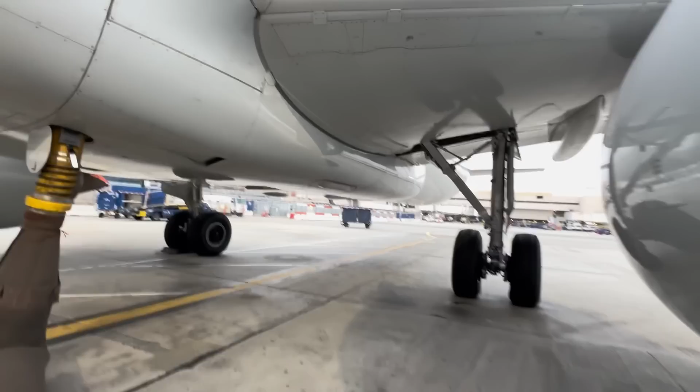Do a quick little walk around, make sure everything's A-okay. Drop the gear door, make sure the barking dog is still up there.

As I mentioned before, this is an Airbus A321 Neo, and this is how we drop the gear doors. Pretty much all major aircraft have this. In order to drop the gear doors, we pull a specific handle which releases the uplock. We have to drop these gear doors for maintenance purposes.

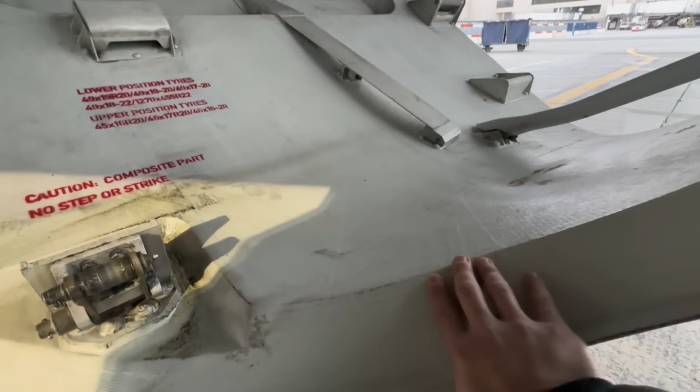A few components on this gear door itself. On the left, that little knuckle is the uplock roller. That is what gets engaged into the uplock actuator and holds the door up. Those things you're seeing towards the middle are called fixed ramps.

So let's say there was an emergency and the landing gear needed to be gravity dropped, or what we call a free fall extension. Pilots will either turn a lever or flip a switch depending on the type of aircraft, and the landing gear will drop under its own weight. That's what we call a gravity drop or a free fall extension. Now these ramps are there to make sure that the main landing gear does not get caught on the landing gear doors during a free fall extension.

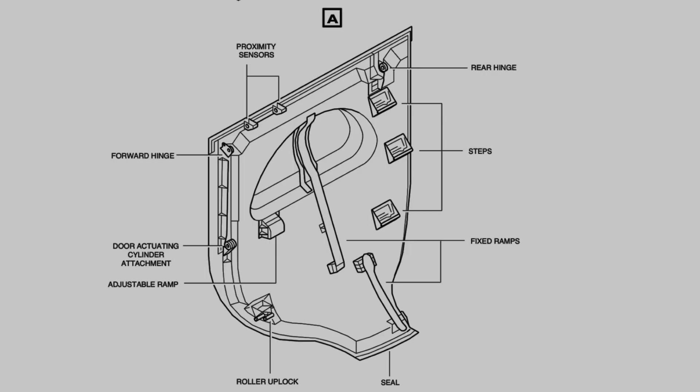The gear door also has proximity sensors and the hydraulic actuator that brings the gear door up, as well as steps for us maintenance to climb up there.

Now let's take a look inside of the wheel well itself. Nice and neat, isn't it? Much cleaner than the 737. It's a lot more organized and it looks much nicer, a lot more room to work in my opinion.

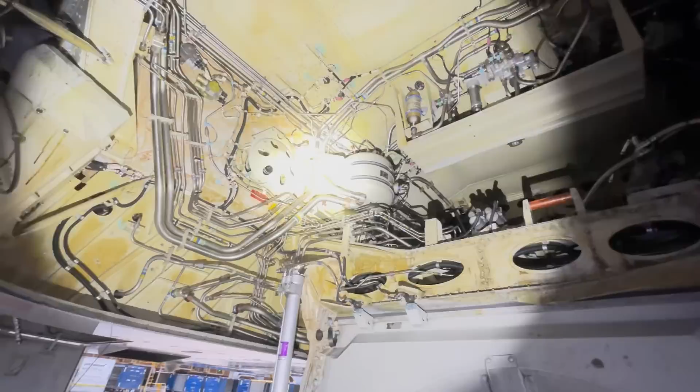There it is, there's your famous barking dog right there. Those rods that you're seeing are called torque tubes. They are for the flap control system.

Now this is a very important component that you're looking at. That is called the PCU, Power Control Unit. It is a hydromechanical unit. Its primary job is to supply mechanical power to the flap transmission system.

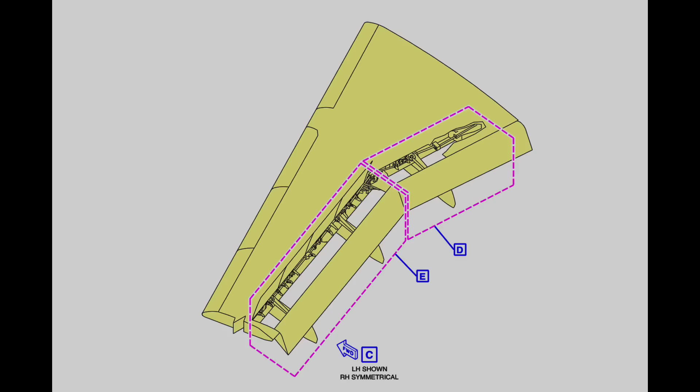It has two hydraulic motors. Once power is provided, the torque shaft and the gearboxes transmit the mechanical power from the PCU to the offset gearboxes of the actuators. A fancy way of saying it will turn those tubes and drop the flaps via transmissions. Watch, I'll actually show you how it looks in action.

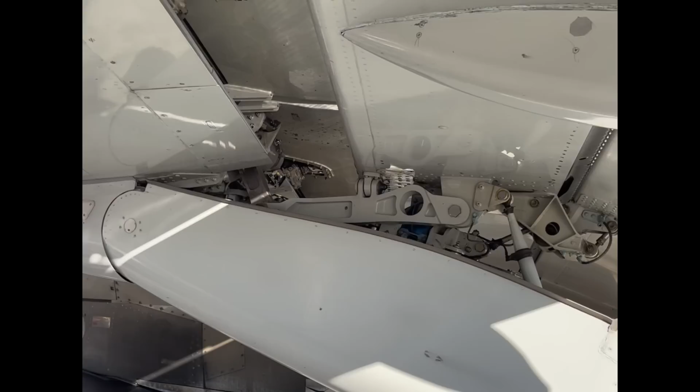As you can see, a pretty intricate system. There's also another very important system this ties into. It's called the WTB, wingtip brake.

It's a form of protection for the flaps. It is an electrohydraulic pressure on brake. What it basically does is prevent the flaps from going off symmetry, meaning you don't want one side of the flap going down further than the other. You want them both coming down at the same rate.

The other protection it does is in case you have a runaway flap, an uncontrollable deployment where it's going full flaps down. It will lock the flaps in a very particular position and stop it.

There's circuit breakers tied into this that are only for maintenance, and these are so pilots don't play with them. Pilots, do not play with these circuit breakers. Bad things will happen. Only maintenance gets to touch these.

As we continue our tour of this 321 Neo wheel well, next you're going to see this thing. That's a reservoir, that particular one is for the green system. There's two others, one for the yellow, one for the blue. This is where hydraulic fluid lives.

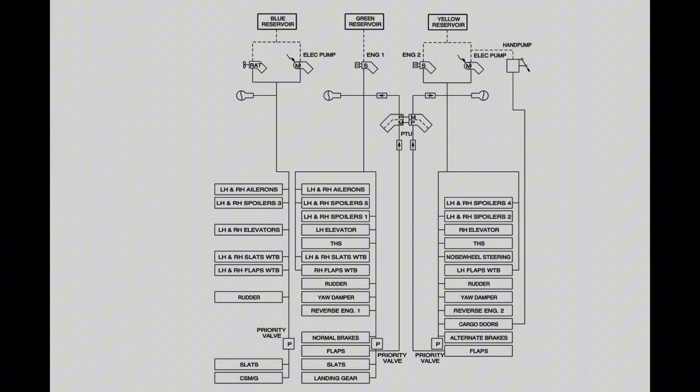Here's a lovely diagram for you, and this depicts every single hydraulic system and what they control. Feel free to pause it and take a look at it closely. Just take a look at the level of redundancy, it's absolutely incredible. If you were curious how much capacity these systems have, the green system has about 100 liters, the blue system about 60 liters, and the yellow system 75 liters.

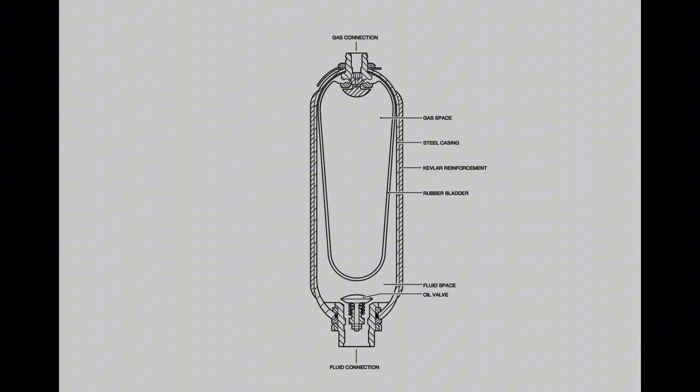As we keep moving forward, you're going to see that cylindrical component right there. That is an accumulator, there's three of these, one for every system. It has a metal body with an outer layer of Kevlar to make it strong. It also has a bladder inside that separates nitrogen and fluid. It will keep head pressure to the reservoir, and it also keeps the system free from small fluctuations in pressure. It also makes a supply of fluid available just in case there's a decrease in fluid in a system. It could also compensate for a temporary decrease in pressure just in case the response time from the engine-driven pump is not enough. Usually pre-charged to around 1800 psi.

Accumulator and a whole bunch of manifolds for hydraulics. Fun stuff.

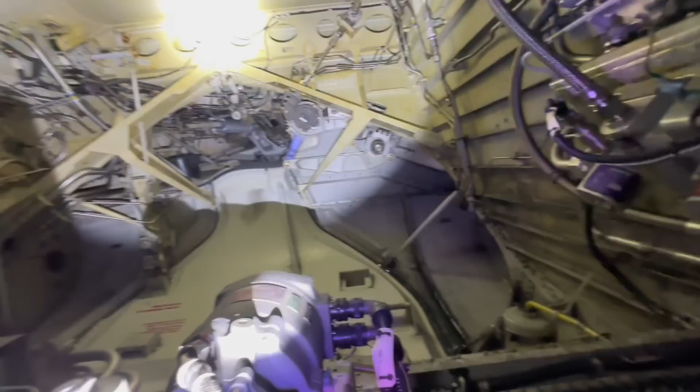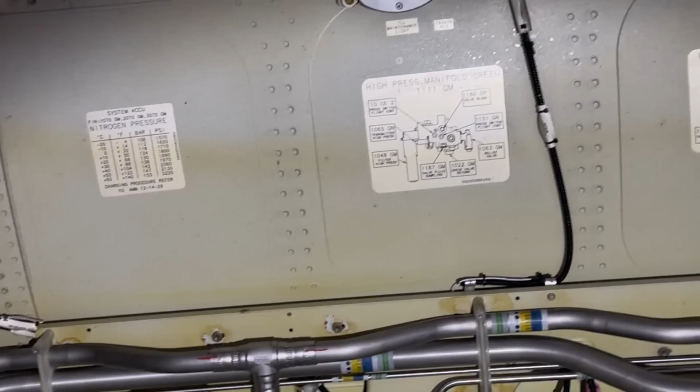Next to the accumulator, you're going to find the high pressure manifold as well as the PTU manifold. There's a variety of components attached to it, such as pressure relief valves, high pressure filters, check valves, sampling valves, and pressure transmitters. Basically distributing the fluid where it needs to go and monitoring it.

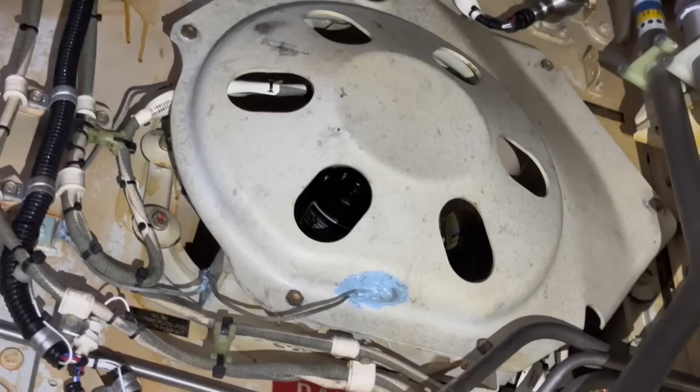As we direct our attention to the forward portion of this compartment, you'll see that component, or I should say it's more of a cover. There are various components in there related to the ACT tanks, the additional center tanks. One of the components inside is a little valve or pump. You can actually prime the pump if the ACT tanks are a bit low, in order to get the fuel flowing if you want to get fuel out of the ACT tanks.

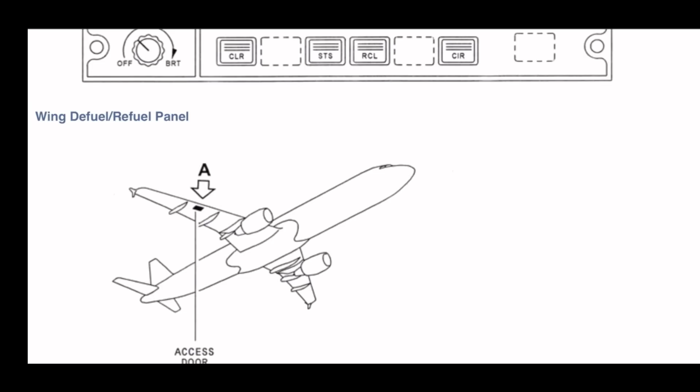Additional center tanks are pretty self-explanatory. The more tanks you have, the more fuel you have, you can fly longer. The most modern 321, the XLR that will be debuting here pretty soon, is actually going to have 3 ACT tanks.

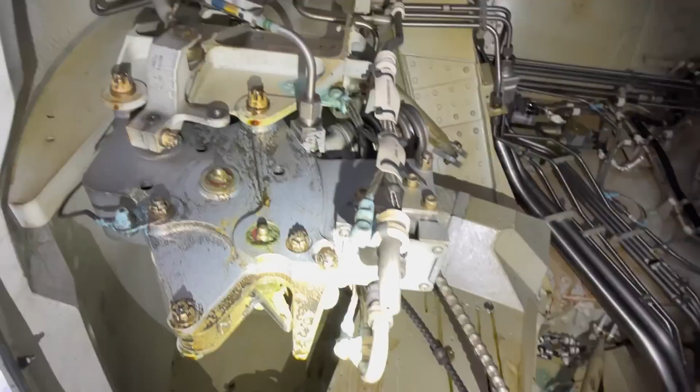Very long flight. Remember earlier I showed you on the door that uplock roller? Well, that's where it attaches. This is the uplock actuator for the main landing gear door. This is where that roller will hook into, and that's how the door stays up or gets released.

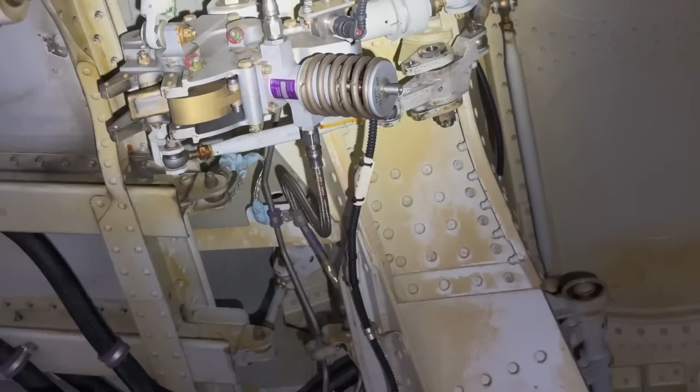Now let's take a look at the main landing gear uplock actuator. It's almost identical, looks exactly the same, just a bit beefier, a bigger unit, because now it's holding on to this knuckle right here. That's what's holding the landing gear up inside the wheel well.

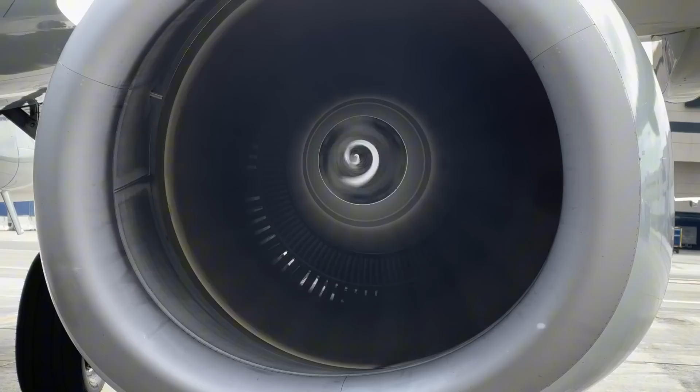Back into the classics. Come on, yeah, there it is. Tight squeeze in here. All good, let's see now. I already did the walk around outside.

Everything's good to go. You guys ever know that on 737s, pilots, this is where the cup holders are? It's kind of funny, if a pilot sometimes brings an oversized mug or cup, it has a tendency to pull these cup holders out with it. Right now this one's glued in, which is good, but sometimes you'll find them loose and it pops right out. It's hilarious, they walk out with their mug or whatever, and the cup holder goes with them. It's funny, anyway, I don't know why I thought of that.

Since we're in the flight deck, let me show you something. This is called the yaw damper gauge. Most modern 737s don't even have this gauge, all the NGs and the Maxes, this is gone. But once in a while, on some of the older birds, you'll find this. The primary purpose of a yaw damper is to prevent any kind of Dutch roll of the aircraft.

I don't have a real airplane to show you this, but I got a little model here, so there you go. Dutch roll, this is what basically, as pilots chime in, you probably know that better than I do, the airplane starts doing this. And the yaw damper prevents this from happening because it dampens the forces of the rudder. Slippage, that's the best way I can explain it.

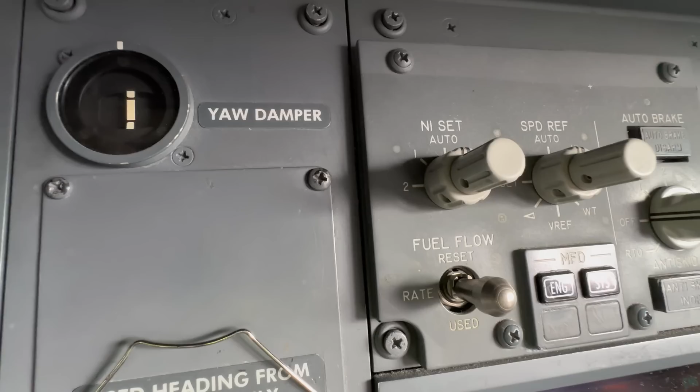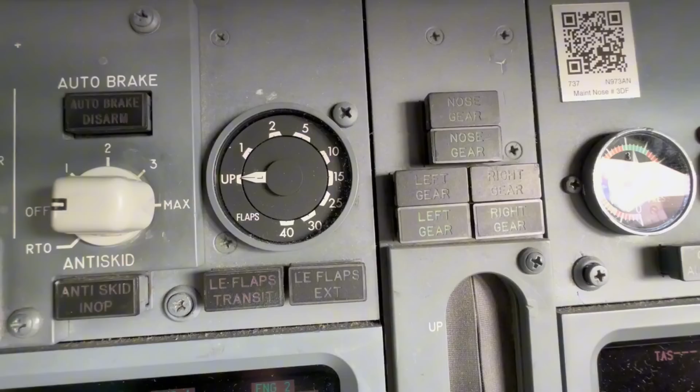Another thing to show right here, this is the flap gauge. This is pretty much standard on all 737s, except on the 737 MAX. On the MAX, the gauge has turned digital, and when I say digital, it's no longer there, it's incorporated into one of the display screens. Last but not least, the brake accumulator pressure, which is reading 3,000 PSI, which is good.

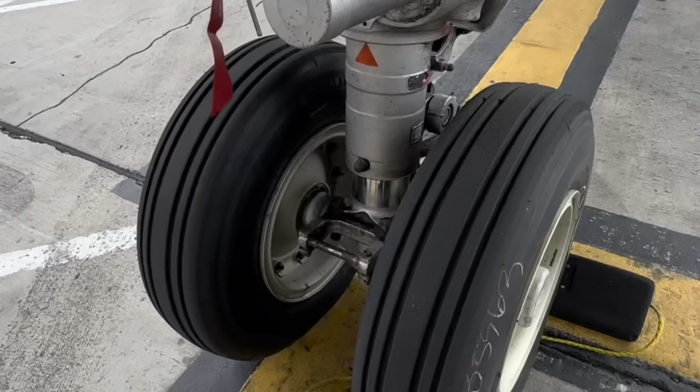Let's talk about the nose landing gear steering system on the Airbus A320 family. This is controlled by the tiller within the flight deck. This is what it looks like. There's two of them, one for the captain, one for the first officer. Maximum travel of the nose gear is usually around 74 degrees.

Now, you guys are clever, and I know somebody's going to ask this: what happens if you have dual input? Let's say the captain and first officer put in input either opposite or in the same direction, what happens? This is how the manual reads: in the event of simultaneous operation, the orders that the hand wheels give are algebraically added. Very cryptic, isn't it? My assumption is it will take the average of the two inputs, and that's what you'll get.

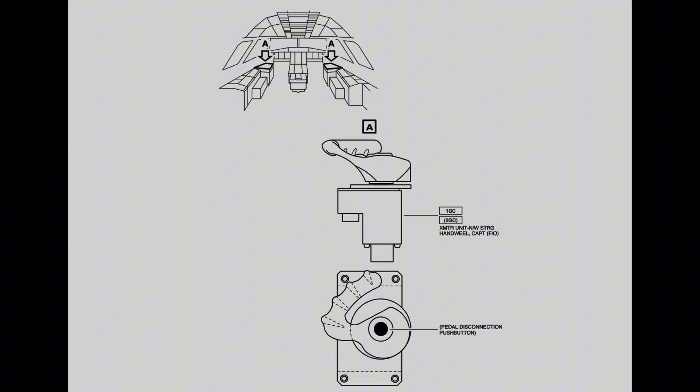You can also steer with the rudder pedals, but with limited degree, about 6 degrees in each direction. Also, when the aircraft is ready to take off and gets up to speed, specifically 130 knots, steering is no longer available. This prevents the aircraft from having any kind of inadvertent input to the rudders or the tiller that could have it run off the runway.

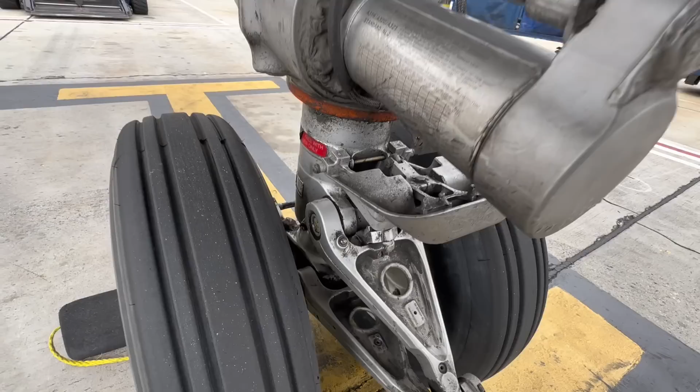Okay, back to the landing gear itself. The Airbus 320 family has a very unique system because the cylinders drive a rack and pinion assembly. Most people that work on this aircraft or fly it have never seen what it looks like underneath there. Let me show you. This is with the cylinders on, and this is what it looks like with the cylinders off. Look how cool that looks. This is the rack and pinion system. It's hydraulically driven, electrically controlled. Remember, this aircraft is fly-by-wire, so no cables, no pulleys, nothing.

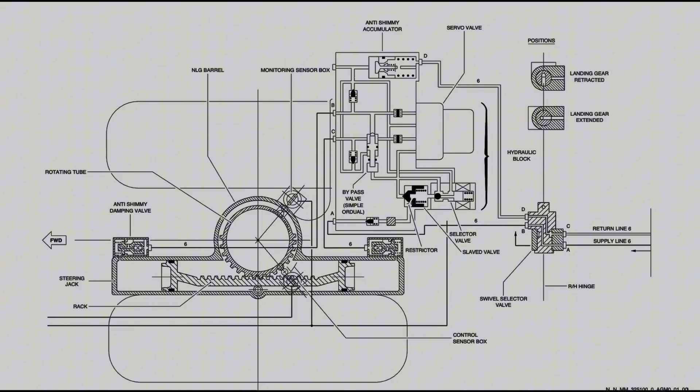Here's a really good diagram that explains how this works. When the tiller is turned in either direction, electrical inputs get sent to computers. The computers then analyze and send a particular amount of hydraulic fluid to either side of that steering jack, those cylinders right there. It will push fluid and move that rack and pinion system along with those gears, moving the nose gear to either direction you want.

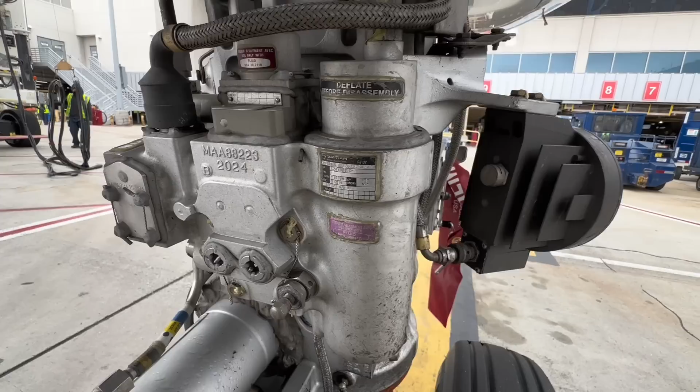One thing I did forget to mention is when the aircraft takes off and the nose strut is all the way extended, there is a centering cam. The nose wheel will go to complete 0 degrees, meaning straight. Now, why am I bringing all this up? Because there's an important lesson to be learned.

Do you guys remember this incident? JetBlue at LAX? Yeah, I remember it because I was there. I watched it happen right in front of my eyes. This Airbus 320 landed with its nose gear completely 90 degrees.

Now I'm going to make mention of this: don't panic, this happens from time to time, but there's an interesting factor to this. I'm going to explain why it happened, but I'm also going to explain why it failed and how it failed. First, let's talk about how it failed. It failed exactly the way it was designed to fail, sideways, completely 90 degrees. It's meant to fail like this.

Well, at least that's my understanding from Airbus engineering. Even when something fails, it's meant to fail in a way where it will not damage or harm the rest of the aircraft. For example, a nose gear going completely sideways is the optimal way for it to fail. Because guess what? If that nose gear were to be skewed in, let's say, a 45-degree direction, that means the aircraft could potentially run off the runway. It'd rather fail completely 90 degrees and have it land like this. Does that make sense to you? Do you see the level of redundancy and safety implemented into aircraft systems? Even when something fails, it fails in such a way that it will still protect the aircraft.

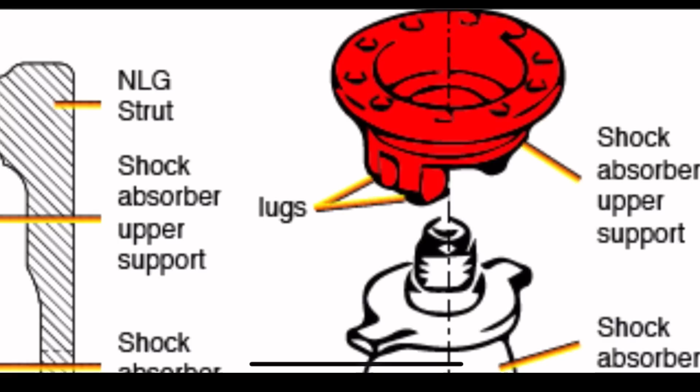So, the culprit. The culprit is this: the shock absorber has lugs. These lugs center the steering, basically preventing it from spinning around freely inside the housing. Investigation showed that the lugs had failed, and this is why the nose landing gear lost its centering position.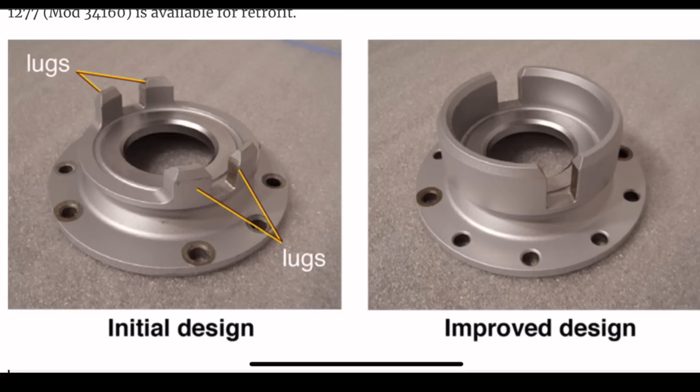There were various factors that Airbus discovered were occurring. First of all, improper maintenance, improper servicing of the nose strut, but they went ahead and improved the design. They saw that the lugs were not as strong as they should be, they were failing much too fast, so they improved the design by reinforcing and putting in a much more beefier component.

I'm not going to sit here and read you this whole manual, but feel free to go check it out. Once again, safetyfirst.airbus.com, and you will find this under landing with nose wheel at 90 degrees.

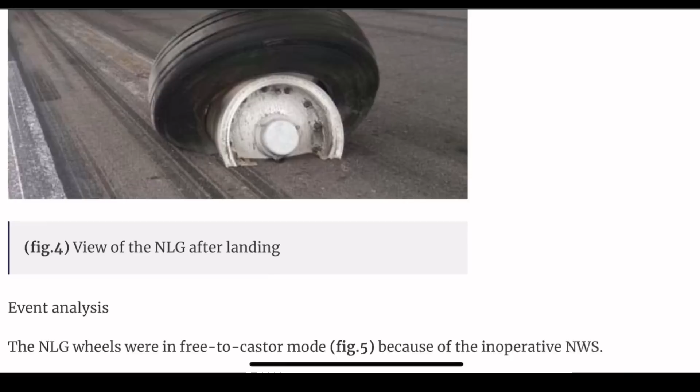And by the way, this isn't the first time that happened with JetBlue. It happened multiple times, so it's not common, but it does occur from time to time. I have to say congratulations to those incredible pilots that landed that aircraft with a nose wheel at 90 degrees. My goodness, absolute proficiency. They put it straight down on the line every single time. That's what I call a proficient pilot who knows what they're doing.

Up next, we got a gorgeous 787, our beautiful plastic princess, and look at that right there. Look what that is, that little fin. Looks like an antenna, but it's not an antenna. That right there, ladies and gentlemen, is called a step.

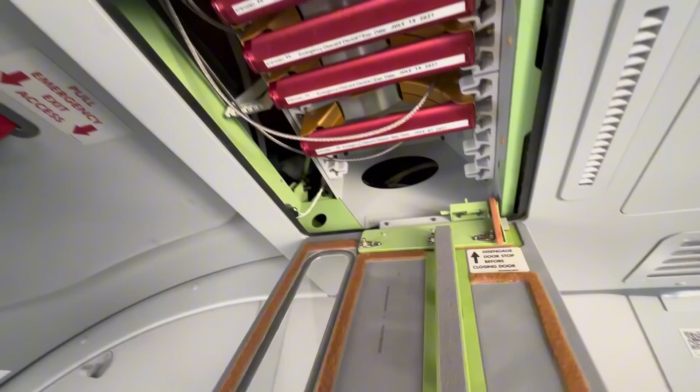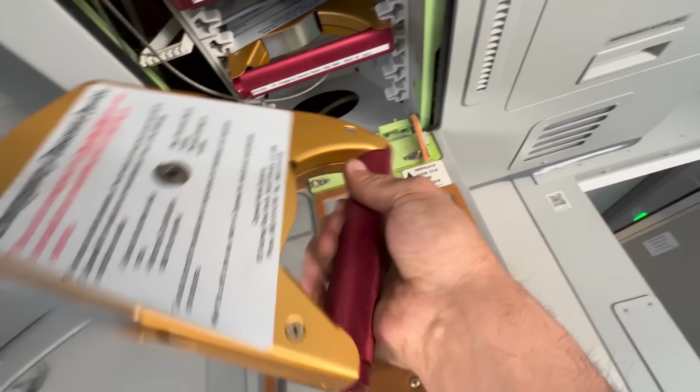This has got to do with evacuation systems from the flight deck, because right next to it, as you saw, is a hatch. If there was any kind of emergency where the pilots needed to escape the flight deck and the flight deck door is blocked, they can use the hatch. Not only can they use the hatch, they can use these emergency descent devices right there in the ceiling of the aircraft. Other aircraft lower to the ground will utilize simply ropes, but an aircraft such as this 787, which is very much up high, needs emergency descent devices. They will pull these out, pull this little step out, and then step on top of the observer seat and open this hatch. Now, I'm not going to open the hatch because this becomes an RII item, but I want to just show it to you.

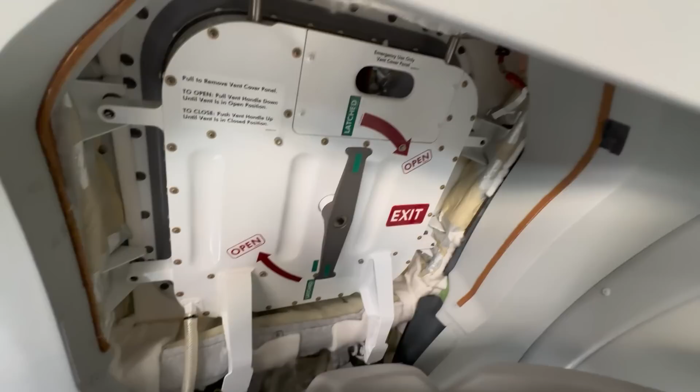They can use the descent devices that gradually lower them down to the ground. But the whole point of the fin, or that little step—let's say the right side of the aircraft is in wreckage. Now pilots have to go to the left side of the aircraft, correct? They can utilize that little fin as a handle and wrap around the cable coming off the descent device, redirecting themselves to the other side of the fuselage. Very simple, very effective, and that's what it's there for—as a handle, as a step, and as a redirection device in case structure is blocking the escape. Next time you see a 787, you'll remember this, I promise.

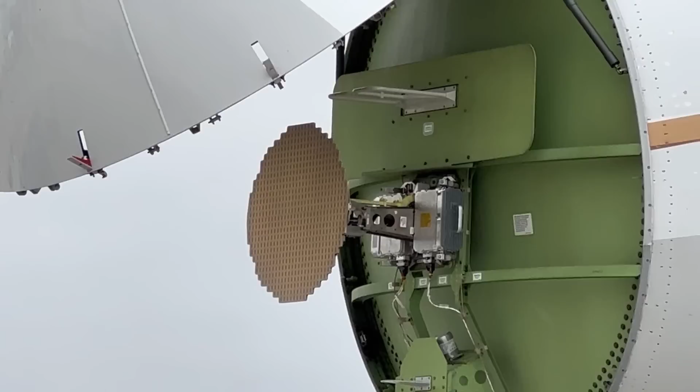Always fun to see cool cars. But as I was driving by, I noticed one of the United birds, a 787, with its radome open, and I took the opportunity—let's see what's inside here.

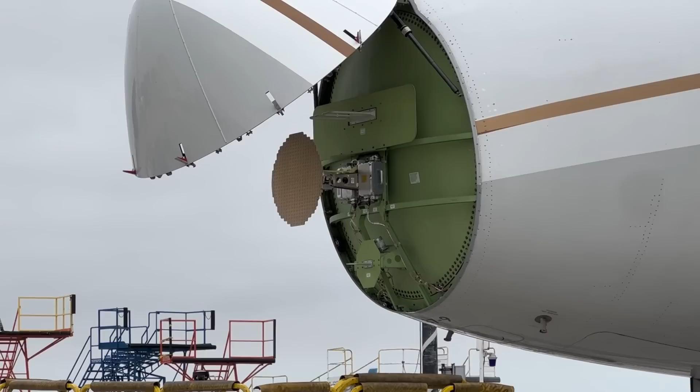Most major aircraft have pretty much the same three components within the radome. So top to bottom, the first thing you're going to see on top is your ILS antenna, better known as the localizer. In the middle is the weather radar assembly. And at the bottom, that looks like a plate—that is your glide slope.

All of these components assist the pilot in landing the aircraft and observing the weather patterns around them. The localizer will use signals to find the lateral deviation of the airplane position from the center line of the runway. The glide slope will find the vertical deviation of the airplane position from the normal landing glide path to the runway touchdown area. And the weather radar will make pancakes.

I'm just joking, guys. It's self-explanatory. It detects the weather, that's about it. It's a very fancy and expensive Doppler 9000 or whatever, you know what I mean.

A common question that gets asked is, what do you do with foreign carriers? What do they do for maintenance? Well, most foreign carriers that fly into LAX usually utilize contract maintenance. It's the same for my carrier. If we go to a station where we personally do not have maintenance, we will utilize contract maintenance that is on station. Otherwise, everybody works on their respective carriers. I cannot walk up to a foreign carrier all willy-nilly and start working on their aircraft, even if it's broken or whatever. They have their own set of guidelines, their own set of rules. I am not allowed to touch any aircraft besides my carrier's aircraft, and vice versa. They cannot touch my aircraft.

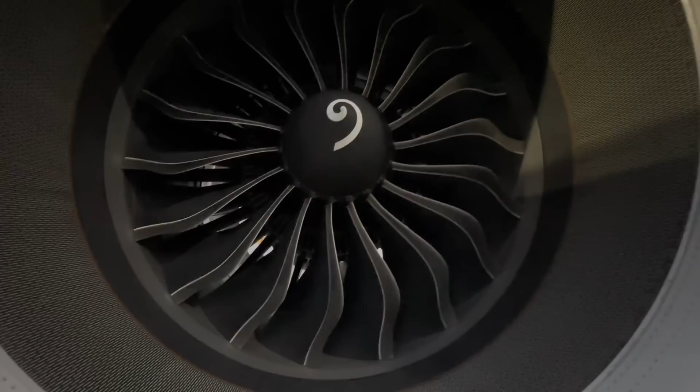All right, just got done servicing oil on this one. Do a quick little walk around, but I think this one stays here. This one came in and it's gonna stay overnight for maintenance. Not much happening today. I know, guys, not a very exciting day, but you know what? I'll take easy days, why not?

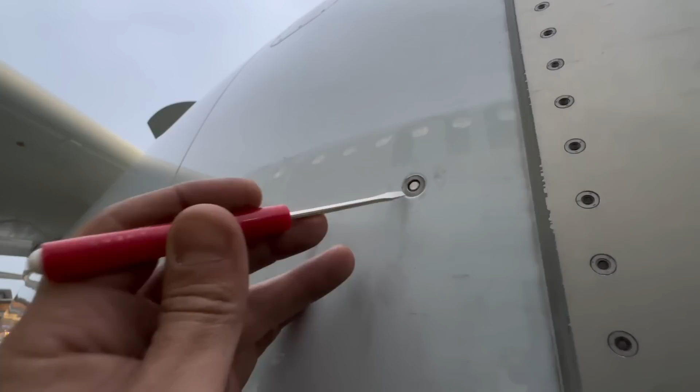Looking good. Somebody asked, what are those little holes on the intake cowling? Right here, these little things. They have a very particular name, and the name is pip pin holes. The reason they are there is for installation of intake cowling covers. There's a very specific pin that will fit into this and lock into place. This is what we usually do when we install cowlings and covers onto the intake to protect the engine while in storage.

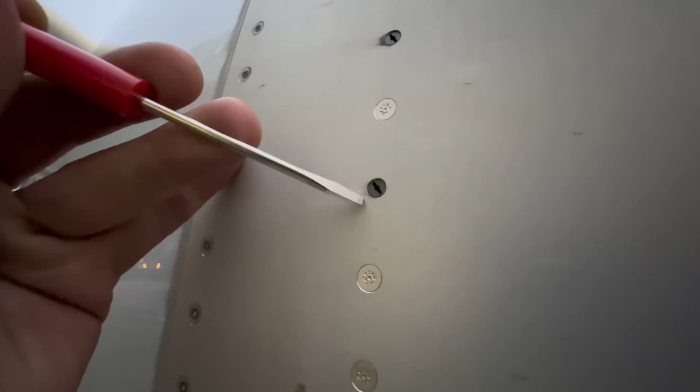There's another set of screws that somebody mentioned, and the label is literally right there: hoist points. These are hoist points used when the nose cowling is being removed. We will install a very specific sling on both sides, and when the nose cowling is being detached from the fasteners, it will get removed with a sling, and the sling is attached right there. They're on both sides, you can see right there. Hoist points are all over the aircraft, there's multiple hoist points all over in various components such as flaps, ailerons, engines, whatever, they're all over the place.

Now, I can't remember who asked to see this, but somebody wanted to see the rain repellent for the Airbus. Well, that's the rain repellent button that will spray it onto the windshield, but the actual rain repellent is back here. That's it.

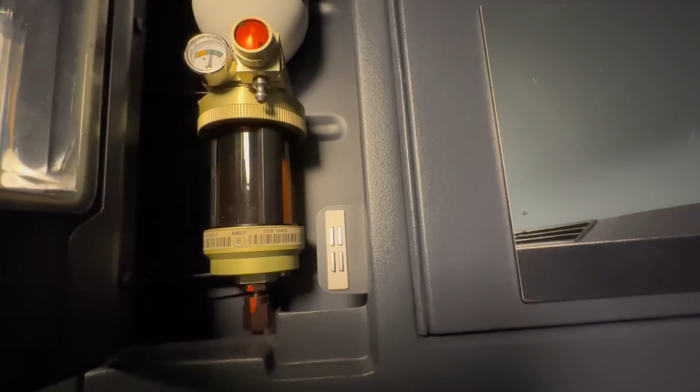I do not know the chemical composition of what is inside that rain repellent, but I know it acts much like Rain-X. When pilots push the button, it sprays onto the windshield and beads up the water.

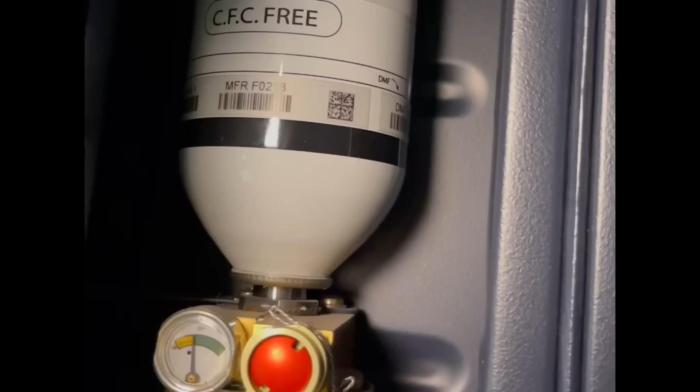Here's a good example of how we change that bottle. The bottle is held on by two bands. Simply loosen and then unscrew the bottle itself. Very simple to do. Once we get the old one out, we install the new one, screw it back in, make sure the pressure is correct, ops check it, and good to go.

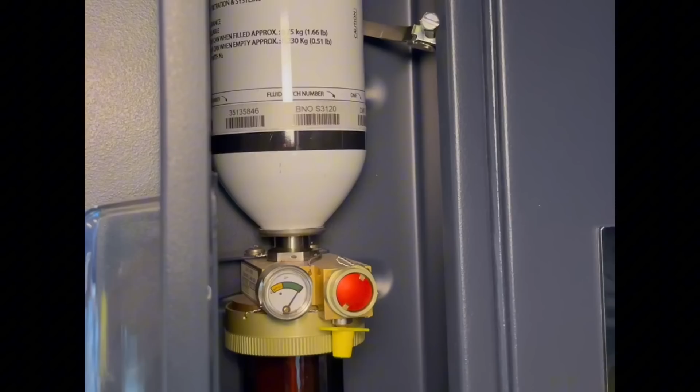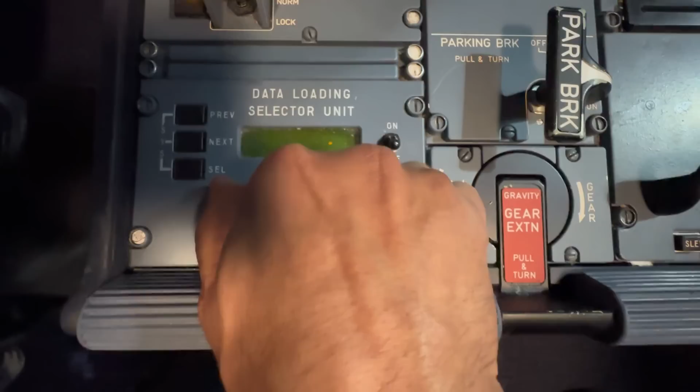This is a port for the aircraft nav data loading. All of the navigational data that the pilots have is done by maintenance. We are uploading the latest and greatest information to the aircraft so the pilots can fly the airplane correctly. We utilize this port, called the cannon plug, and install particular software to the aircraft that is updated to all the systems.

Well, this brings back some memories. In the olden days, back in the early 2000s, late 90s, and even before that, we used to actually upload nav data via floppy disk. And I tell you what, that was a pain. That was a nightmare. God forbid you got a corrupted disk and uploaded something like that. Don't worry, the airplane will let you know because it will just reject the data. But you would sit there for hours on end trying to upload data. Oh my goodness, it was horrible.

Nowadays, it's much more sophisticated. All you have to do is hook up a very sophisticated piece of equipment with data already preloaded and just upload the information to the aircraft. But yeah, it just brought back memories from floppy disks. It was just crazy back then. But what are you going to do? That's the technology we had back then.

All right, Jerry, go for it. Close the door. All right, man. Lock the door. There it is. That's why that light is there. All right, unlock it. Lock it.

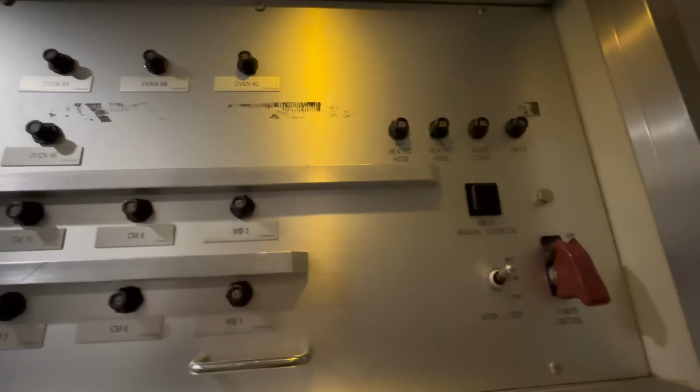Somebody asked about the galley equipment within an aircraft. This is the one I had available right now, the 787. So these are the galley equipment right here. It's pretty standard - coffee makers, water heaters, lots of storage compartments all over the place. The storage is a lot, I'm going to tell you this right now. There's a ton of storage within aircraft. They're all over the place.

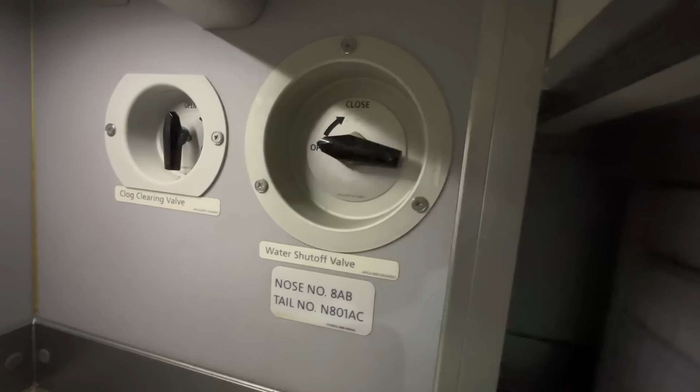You also have amenities such as faucets for water right there, and you have trash bins and shut-off valves in case we have to defer some portions of the water compartment. But you also have ovens for heating up your food for long-haul flights.

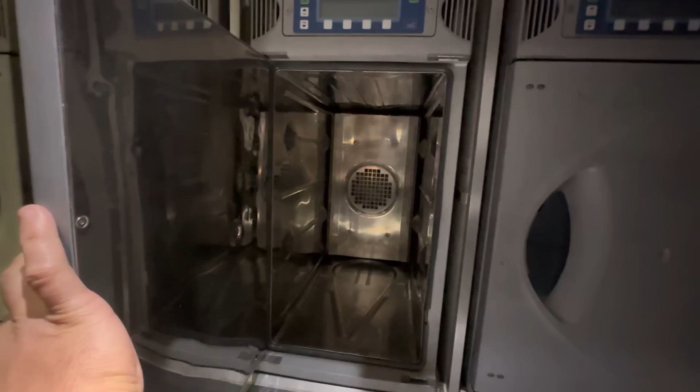Pretty much any aircraft you walk onto, most galleys look exactly the same. Spacing and sizing may vary, compartments may vary, but the amenities such as coffee makers, ovens, all stay the same. It's pretty much standard all across. And obviously galley carts - this is where you keep your food and your drinks, and there's a refrigeration unit that keeps all of that cool.

Bigger aircraft have multiple galleys. They'll have an aft galley, a mid galley, a forward galley, but they all have the same equipment.

All right, let's end our night with a beautiful plastic princess. It's good, this is a quick turn. I believe this thing's going out to Miami. So just got to put the oils that I serviced into the logbook, make sure there's no inbound discrepancies, but otherwise, so far so good. She's a good, healthy bird. Hope you guys had fun. I'll see you bright and early in the morning. Don't forget the coffee. Later.

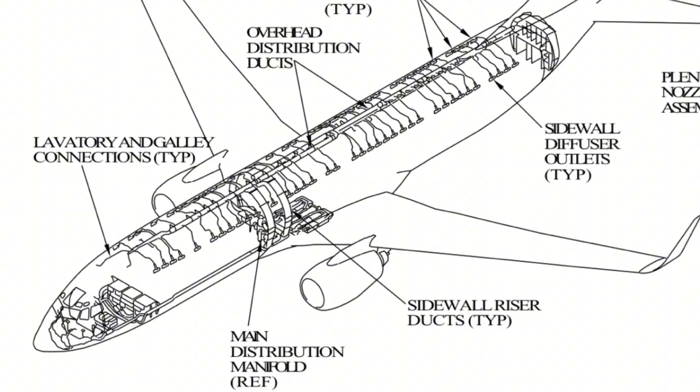I think it's like around seat 13 or 14, somewhere around there, depending on interior configuration. But yeah, sometimes you get a seat with no window. It's unfortunate, but that's the way it is. Now, here's what the gap looks like - this is all the distribution, and the main gap, which is the main distribution manifold, is right there, right where the windows get skipped.

Now on a 787, it's a little bit different. I'm going to show you something real cool over there. The distribution system for the air conditioning is very well routed and very complex - it's a rat maze. But you miss sometimes windows like this for a very specific reason. Can you see it? It's the seam - the structural seam of the aircraft. You can't put a window right at the seam. Interesting, right?

You'll see it over here in the front as well. Let's take a look - oh yeah, beautiful GEnx right there. There you go, another seam right there. See? No window. You can't put a window at a seam.

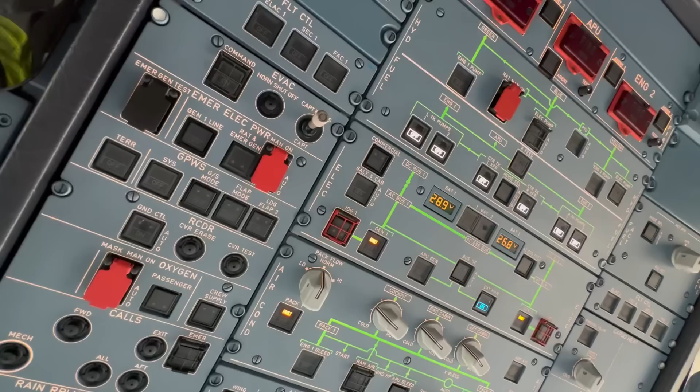It so happened to be Sunday, and it was Mother's Day. Unfortunately, I was working, but I know my mom is watching. Believe it or not, my mom watches my YouTube videos, and I just want to tell you, Mom, I love you. I love you so much, and thank you for giving me everything in my life and bringing me into this world. I wouldn't be here without you. I wouldn't be the man that I am without you. Thank you, Mom. I love you.

Next office, back to the 787. This was a super quick turn. Came in from Miami, going right back out to Miami. Get some oil, do a walk around, make sure everything's A-okay.

Ain't that beautiful? That's a work of art right there.

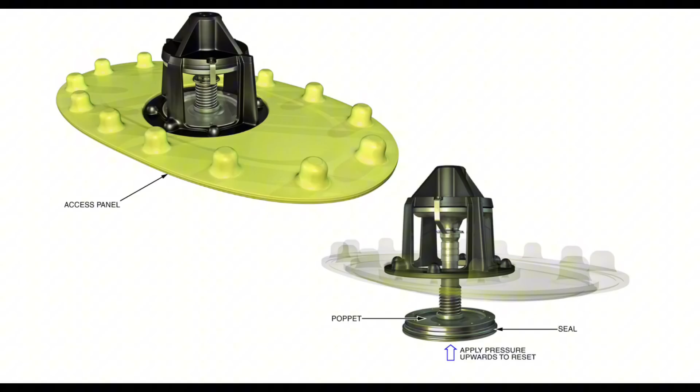And here's what it looks like on the 787 when the forward lav is occupied. If you remember from the Airbus, it was on the overhead. This one's on the door page. There it is, some context right here. So obviously the lav occupied is what I talked about before. Forward lavatory is occupied, and on the 787, the indication comes out on the door page. But let's talk about the rest of this page right here.

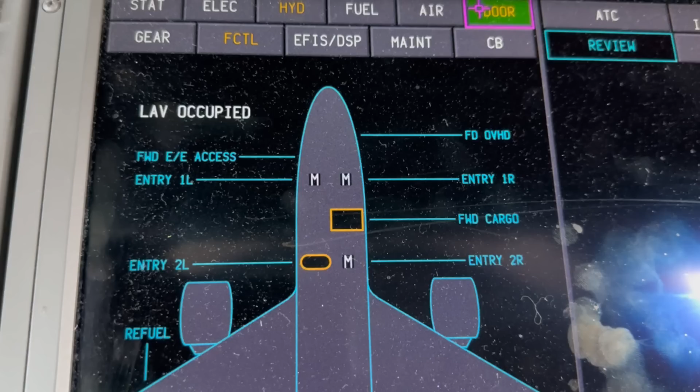So anything that is circled in amber means that door is open. The 2L entry and the forward cargo door are open, hence why it looks like it's open - you get an amber circle around it with an indication like that. Now pay attention to this, the one that says M next to the 1L, 1R, 2R. Those doors are closed, but the M stands for a very particular reason. It's meaning the door is closed and latched, but the slide is not armed. It's in manual mode, the slide is in a disarmed position, hence why you get that indication.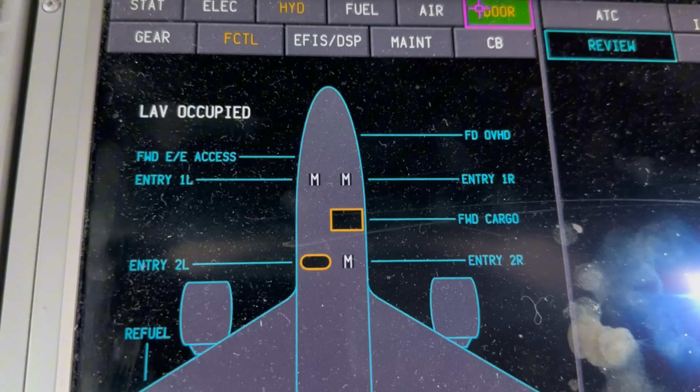Airbus does it a little bit differently. This is the way that Boeing does it on this particular aircraft. So there you go, next office.

All right, got a 777. This actually came in with the inbound reporting a gear indication system issue. Let's find out what the problem is. We need to go through the MAT, the maintenance access terminal. So let's go, let's boot this up.

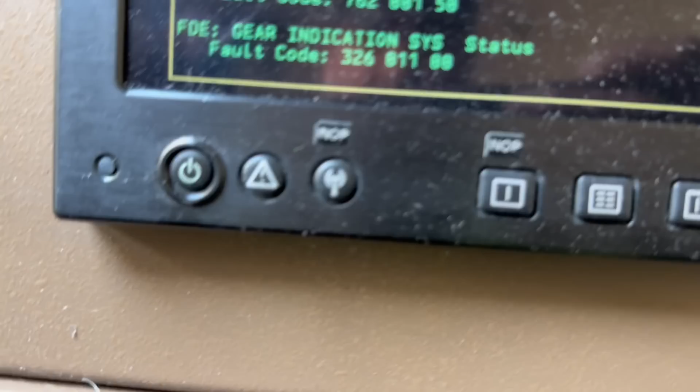The maintenance access terminal is our direct key on this 777 to access the aircraft and its logistics and how to troubleshoot. Right now I am troubleshooting ATA chapter 32, which has got to do with landing gear. At this particular moment, I utilized my manuals and found the troubleshooting code and found what exactly I needed to bite check, built-in test equipment. The aircraft is so self-sufficient that it has its own built-in test equipment.

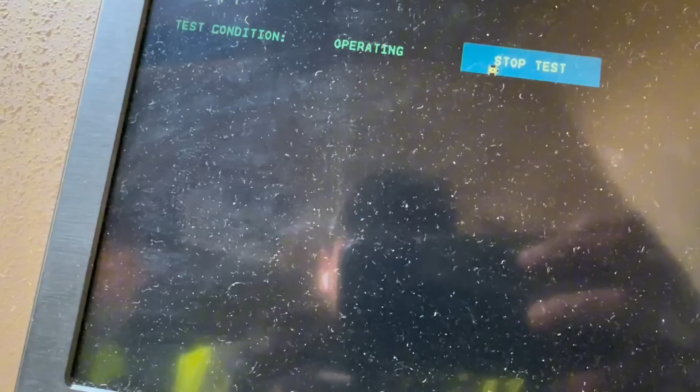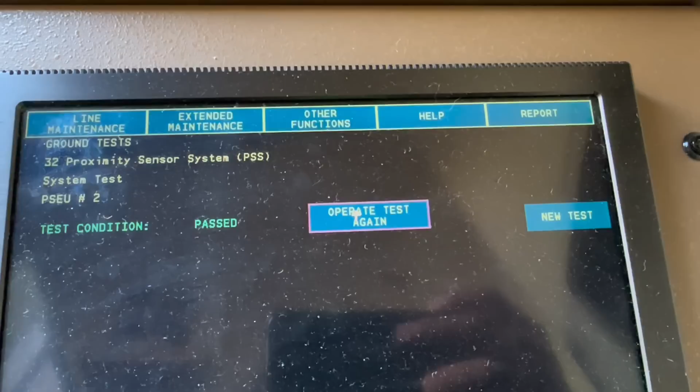I simply needed to run the test on the PSEU, proximity sensors. The reasoning for this fault is sometimes the aircraft, when it lands, does not land all together, as in not all gears touch at the same time. Sometimes one main landing gear touches before the other, on the left side or the right, and it will cause a discrepancy. I need to perform an operational check to make sure that the sensors are not failing. So as soon as I did that, I performed the operational check of the system, and everything came back clean.

No faults, nothing noted. I even looked back into the history of the aircraft. We have a database of information, and I didn't see any kind of discrepancies within 30 days of flight. That means the aircraft is good to go.

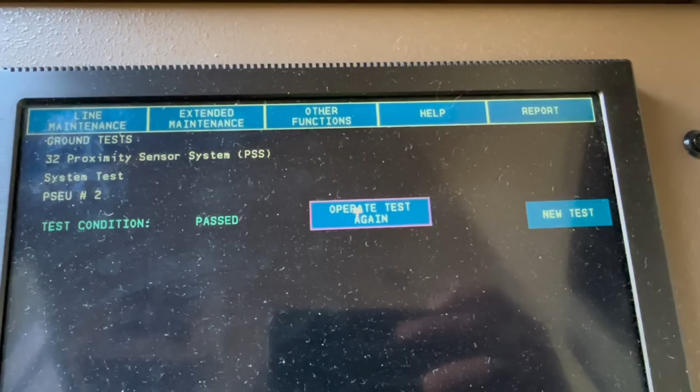Sometimes these little hiccups occur and the aircraft produces a fault. We can do some troubleshooting tactics, clear the fault, and let the aircraft go back to being airworthy. As soon as the aircraft starts producing a trend within faults, that's when we get concerned, and we'll probably ground the aircraft or change out a part. But otherwise, when something like this happens, it's not a big deal. It's just a nuisance fault where we can clear it and let the aircraft keep going on its way.

We're wasting no time.

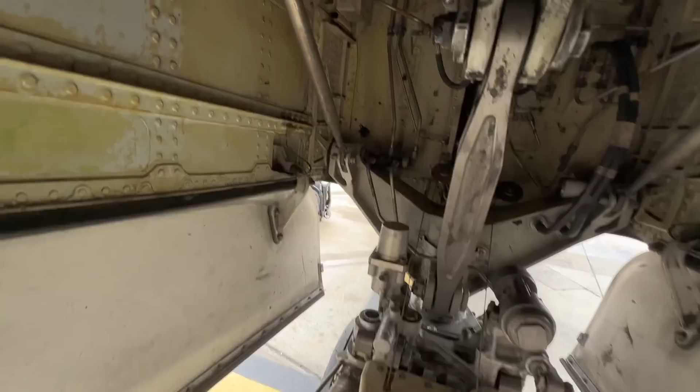Good, looking good. I think I pretty much talked to death of what's in here. How about a smiley face this time? There you go.

Drop the HUD down, drop the HUD down. Okay, engage it. Let me get in front of you and see if it's engaged.

You know, I like to talk. I like to talk a lot, and sometimes I talk too much, especially around my younger technicians. I want to tell them everything I know, just like I want to tell you everything I know. I need to pass on this knowledge. I'm not going to gatekeep it or hoard it. What am I going to do, take it to the grave with me? No, it'd be useless. I'd rather share it with the world, and let the next generation of technicians or individuals enthusiastic about aviation understand what it takes to become an aircraft maintenance technician, as well as understand aircraft systems, whether they want to be a pilot or anything else within the aviation industry.

I am your biggest fan, trust me when I tell you this. I want you to succeed in everything you do in regards to aviation. I will always give you my knowledge, and I always have my mind open to learn from you too. I have the honor of sitting here showing something to a young technician that is incredible and wise, wanting to learn and explain a system that's there. It's in the manuals, but sometimes it takes a senior technician to explain it in a different way, and it opens their eyes up to more things.